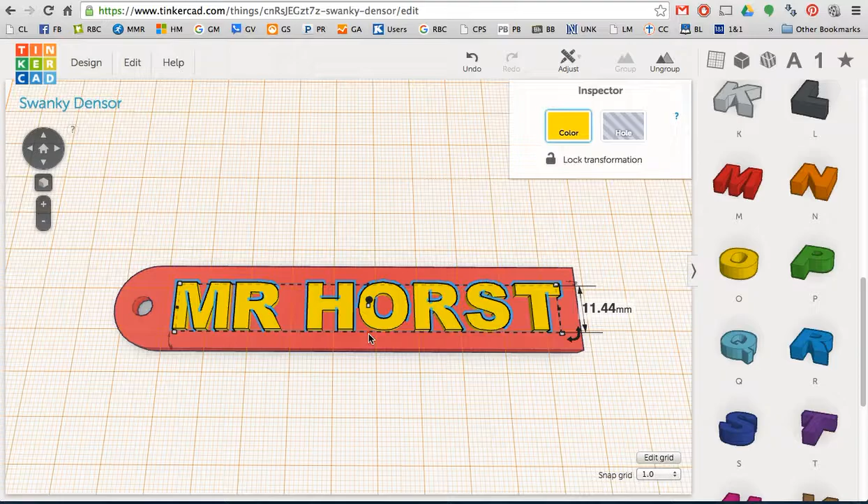The nice part about grouping my name together is if I want to shrink it, I can click my name, and because all the letters will change at the same time, I can grab any of these handles around my name. It's a little confusing because our work plane has moved, but I like to grab these white boxes in the corner, and then you can shrink the length and the width at the same time.

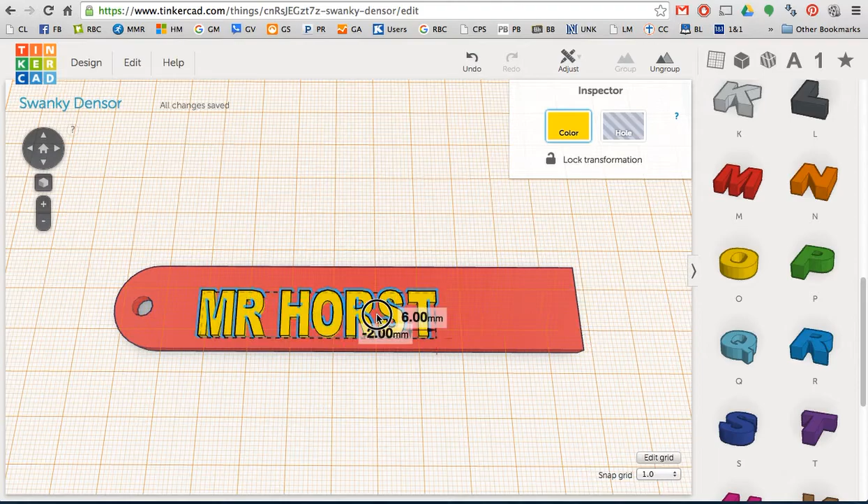So I'm going to shrink my name down, and I'm going to put it down here at the end. You can pick wherever you want it, if you want it in the middle, at the end. The only place you really don't want it is covering up your hole, otherwise when it prints it'll create a lot of problems and we won't get anything we're happy with.

So at this point I have my name in the middle, and I'm going to spend some time over here at the right in the library. I'm going to go ahead and close the letters. There's some numbers. You can add some numbers in there.

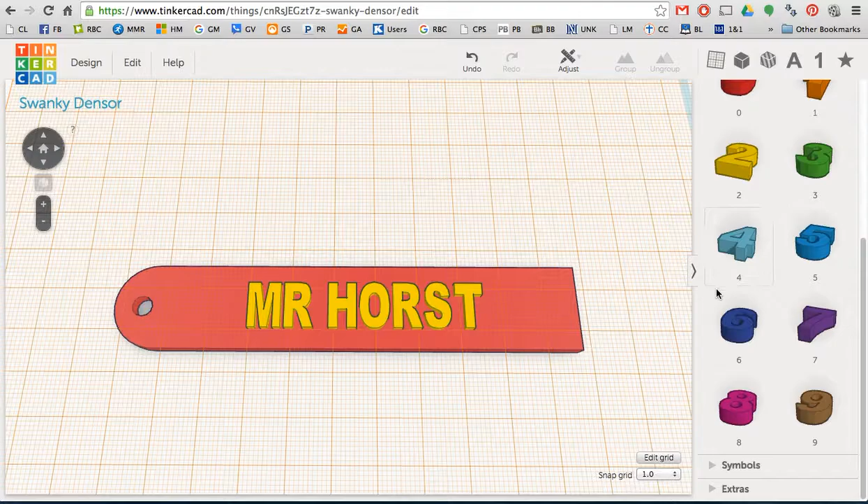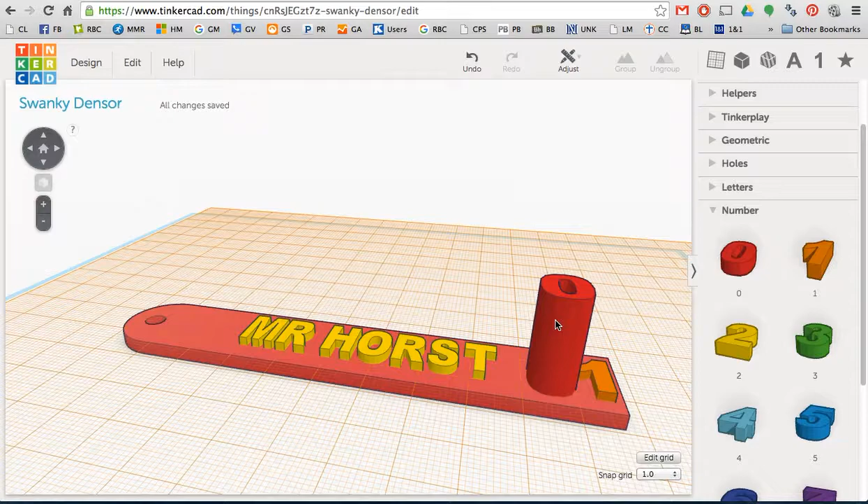If you have a favorite number, you can add it on to the end of it. If you wanted a 0, 1, you can drop both those in there, and customize them however you need to. You could change the height of them again, just so they go down to about 2. You could do crazy heights. If you wanted this thing to be 20 millimeters tall, you could do that, but I wouldn't recommend it because they'll break off fairly easily. So again, I don't want these, so I'm just going to click them and hit delete.

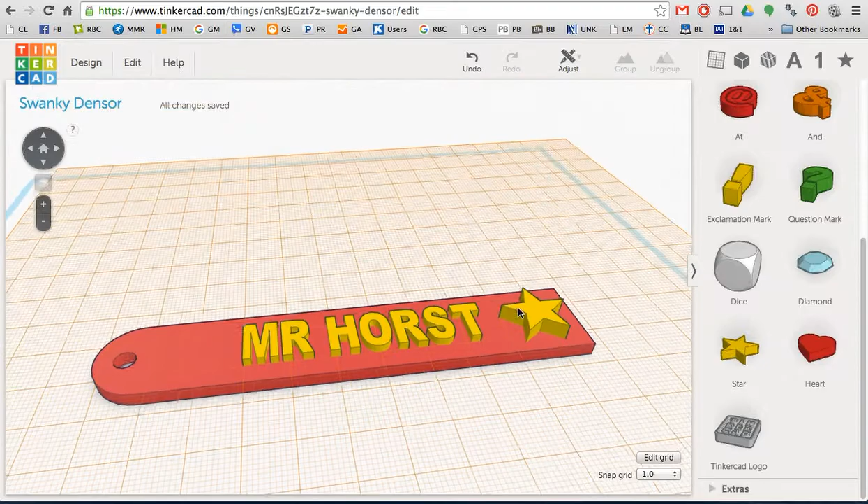So again, there's numbers there. There are some symbols, not a lot of them, but there's a star and a heart. If you really wanted one of those, like the star, I can bring it in here and stick it on the surface of my name tag, and see what that looks like as well. So you can merge shapes.

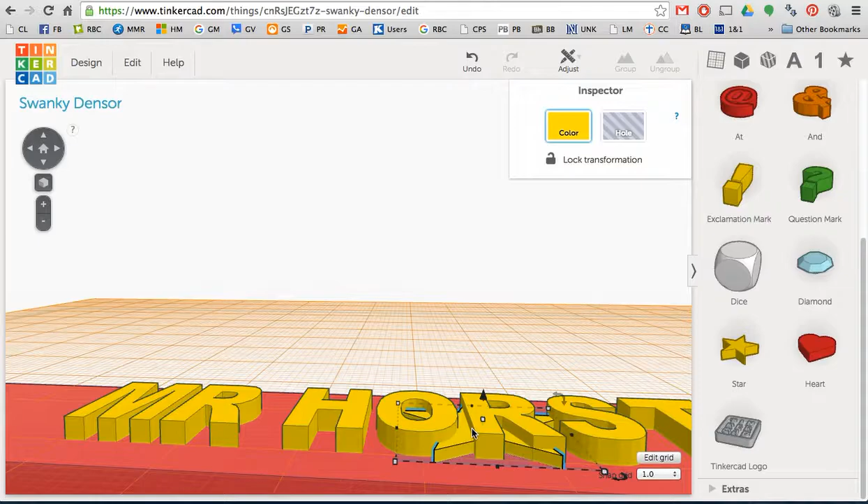My name is 2 millimeters tall, and if I wanted a star to be behind my name, I could smush this down to like 1, and drag it behind my name. When it printed, you can kind of see what would happen here. It would print a star behind my name at a different depth than my name. Might not look the best, might be a little harder to read, but it is totally possible, and it's something that you could do. But I'm going to go ahead and delete that.

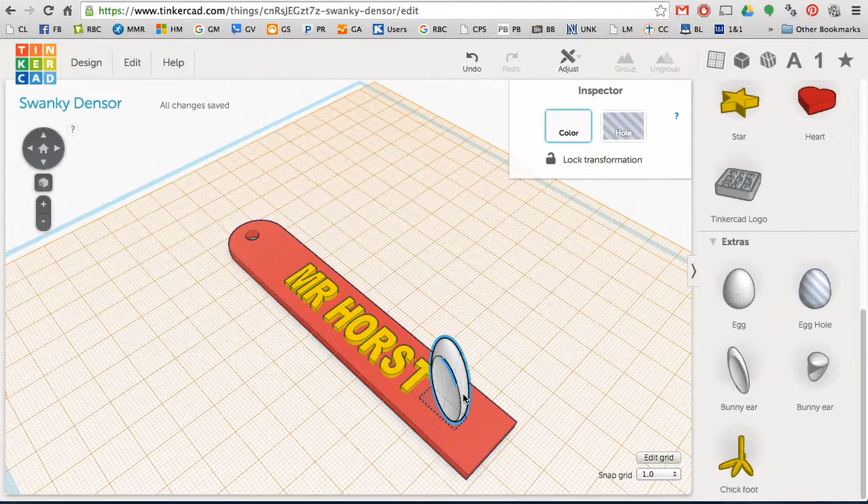So again, there's some things there. There's also some things in extras that you could try out. The one thing that is not a very good idea, if you grab something like the bunny ear here, is printing something like this on your name tag, just because they're very tall and very weak, they will break off pretty quickly.

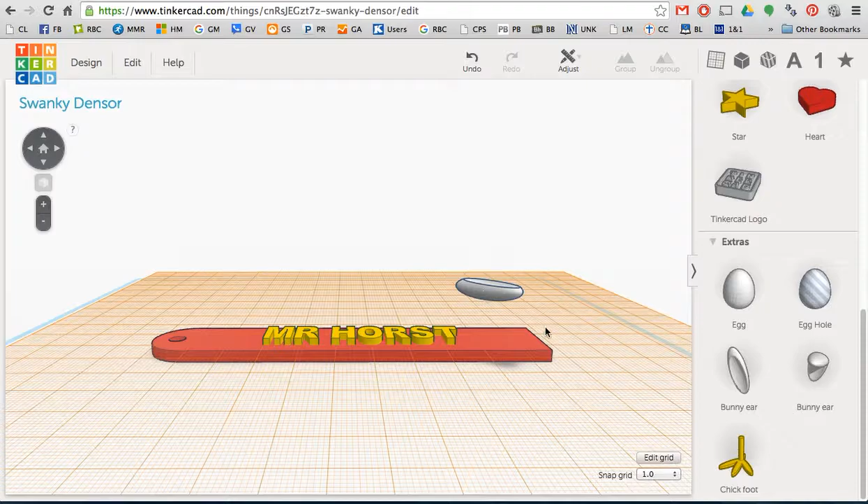And if by chance you rotated it so it was kind of floating in the air, it also makes things a little hard. 3D printers can't do something like this. They can't print the space underneath it. They can do what's called supporting to print this clear up here, but it would be pretty fragile and would break off very quickly. So for now we're just sticking with flat things.

I could click on this and drag it down, so it would be something like that. They actually can do this kind of printing, but here's the one thing that we don't want to do: we don't want something to be underneath our name tag so you can see the other side of it.

What that does is the 3D printer tries to print at the lowest point, and so if something sticks down here, it prints this first, and it has a very hard time making this look nice and smooth on the back. So we want to keep things so they're not stuck through the name tag.

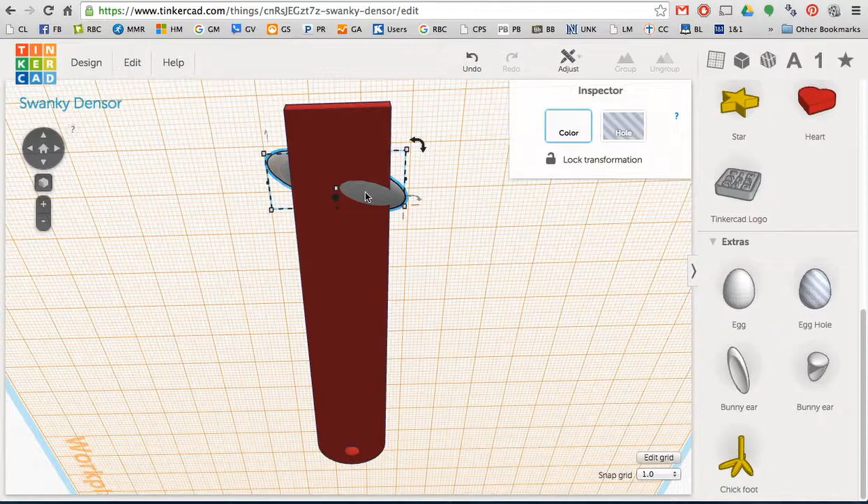I'm going to go ahead and reset my home view here too. So what I do want to show you though, we're going to go ahead and close the extras and the symbols. There's a couple things up here. You could import a shape if you had an STL file, such as our cardinal logo for our school. You could import this. There's also again the shape generators.

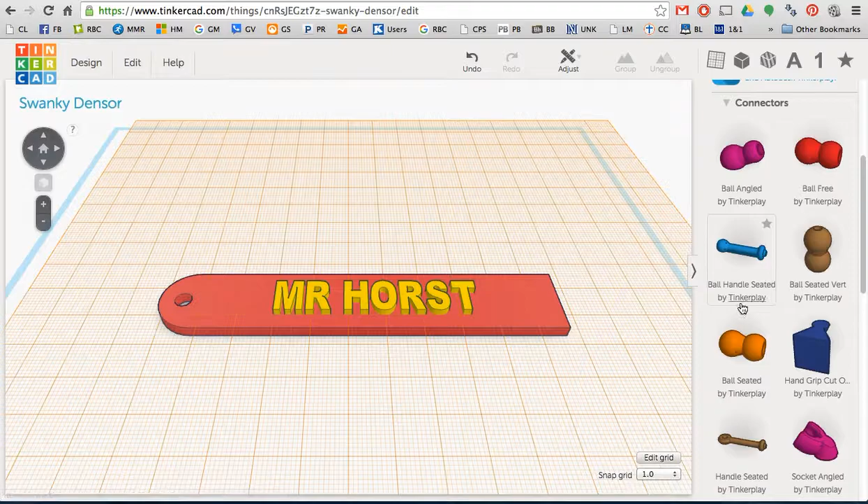There's the helpers. Tinkerplay has some interesting things. These don't seem to work very well for our name tag design, so I've had my students stay away from those. But the shape generators actually does have some pretty cool things in there. There's some TinkerCAD shapes if they ever load. You could do text this way. There's some rings.

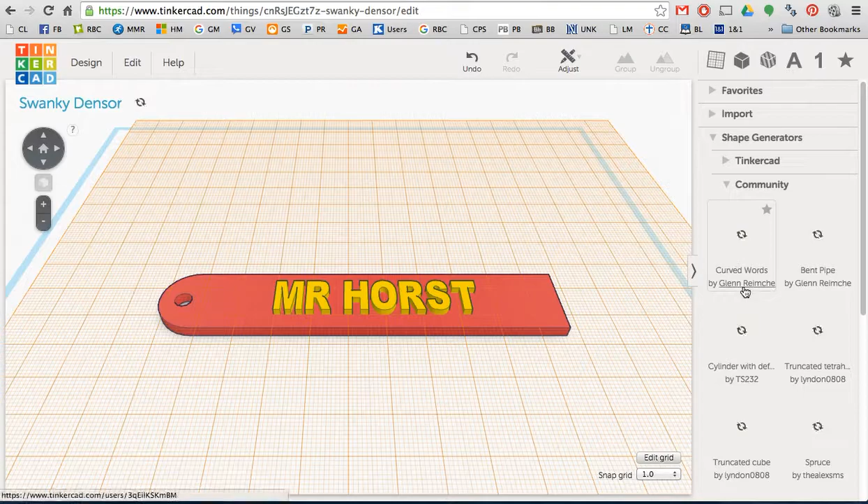There aren't very many of these, so we don't use them a whole lot, but the community is actually pretty cool. There are a lot of different choices in here, like a Christmas tree, and there are 23 different pages of things you could add.

So if you wanted a tree, you can just click and hold down and bring that tree in. Sometimes if it doesn't show up, you can zoom way back out, and usually it's stuck off to the side.

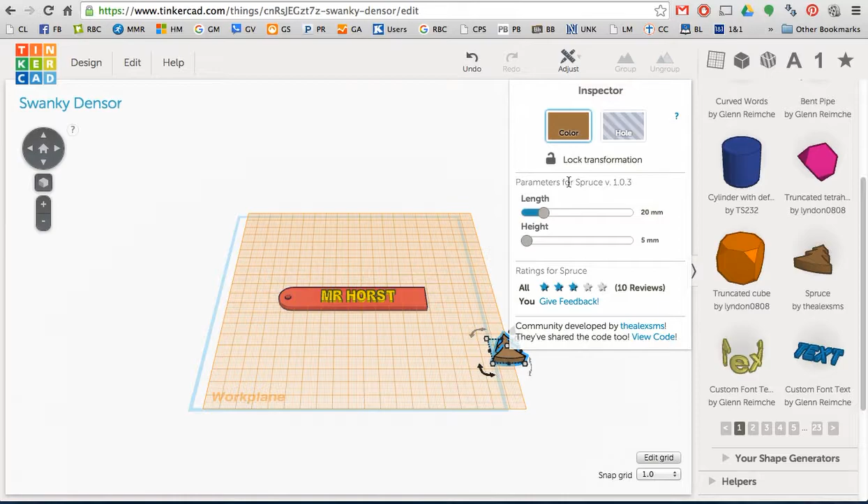The nice thing about these TinkerCAD shapes is you can actually change a lot of it just by clicking these sliders right here. So I'm going to bring my tree up to my workplane.

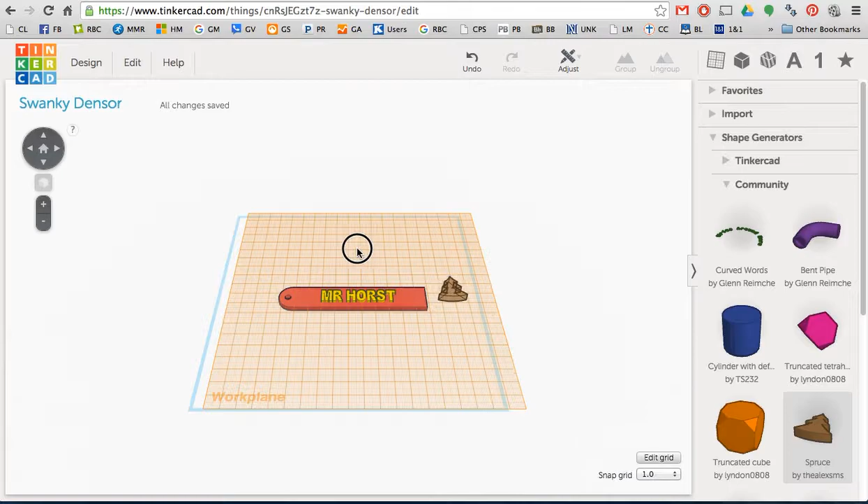For some reason mine's stuck, so we might just get rid of it and see what happens. We'll click on this tree and delete it, and try that one more time. There we go, and we'll zoom back in again.

That is the one problem I do have, is the inspector eats up a lot of screen space. So if I'm messing with something, I'll minimize my library over to the side. And there is my tree on my name tag, if I want one on there too.

The one thing I do like, if you keep going through the community, is on page 7, currently page 7 - it'll probably change later on - there's a lot of crazy different shapes.

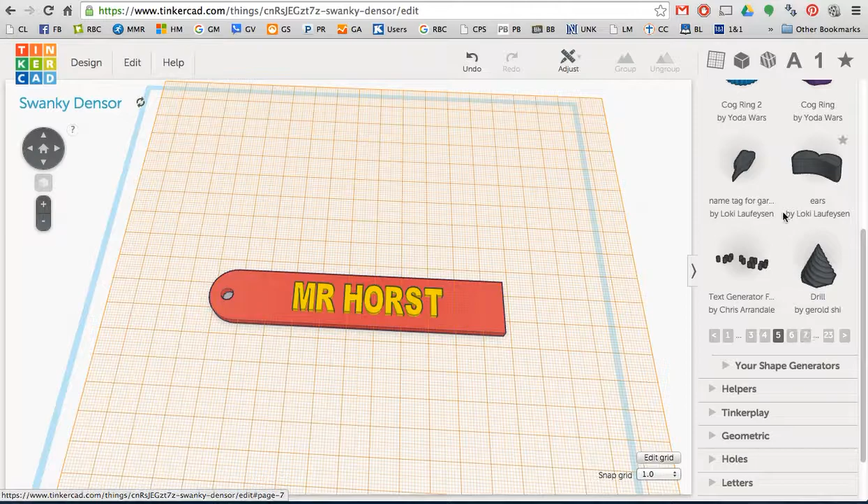There's a drill. You could totally add a drill on the end here and make sure it fits on your name tag, but now you'd have this huge spirally shape stuck on the end, which is pretty cool actually.

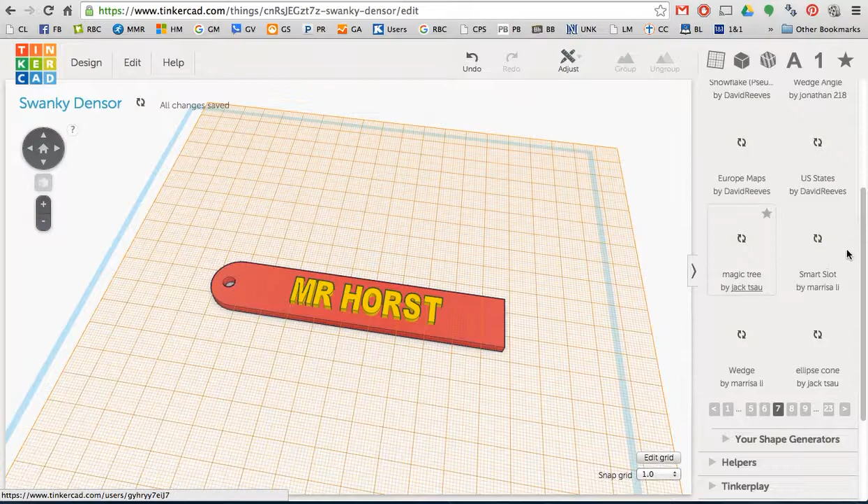And you can shrink those down too. But the one thing I think is pretty cool on page 7 is somebody actually went in and created US states. So if it'll load here, here are the US states.

Right now it doesn't matter what state it is, you can just bring it over to your work plane and it adds it. Once you drop it in, it actually shows you right here the name of the state, and you can click on that and choose different states by scrolling through the list.

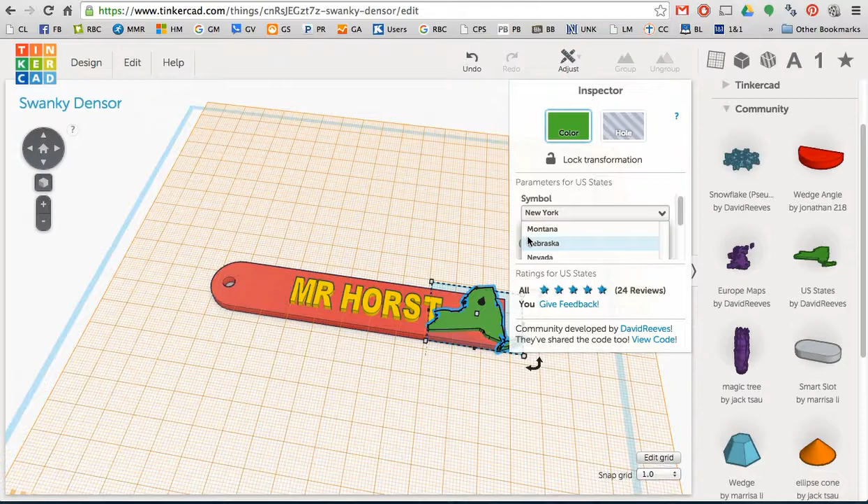So I can go find Nebraska over here at the end, and there's Nebraska. I'll click on that - it'll take a second or two, but now I have a Nebraska map on my keychain, which is pretty cool. I'm going to leave that there, I like that enough.

I'm going to go move my name over, and then move Nebraska back over. Same thing too, if you decide you need a different height, you can grab height right here and make it really, really tall.

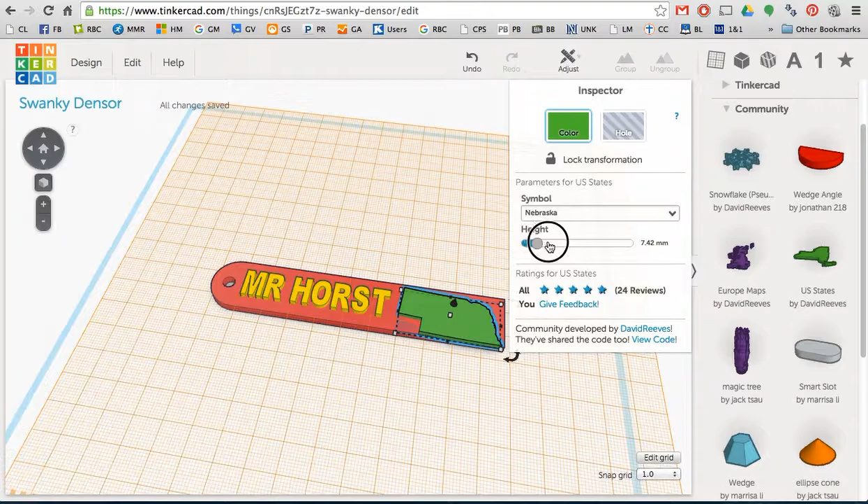Which does have a tendency to slow things down a little bit, so I'm going to go ahead and hit undo, shrink that back to 2 millimeters.

The one thing I do want to be careful of is making sure, before I'm all done, I can see right here if I zoom around, it looks like my state's sticking over my name tag just a little bit.

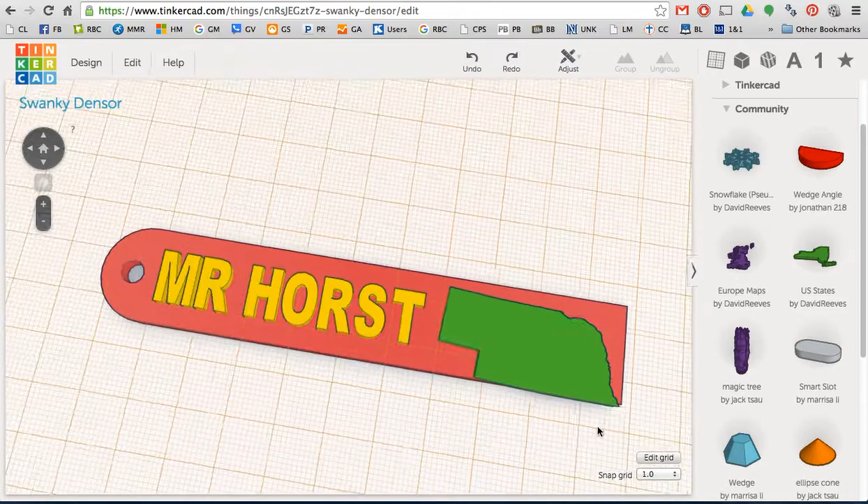So what I'll probably do is rotate back to the top, and I can use my arrow keys to kind of nudge it around to get it all back on here.

And if you're not happy with the way it angles, there are rotation tools, and you can spin that around to get it lined up however you want. So I'm actually pretty happy with that.

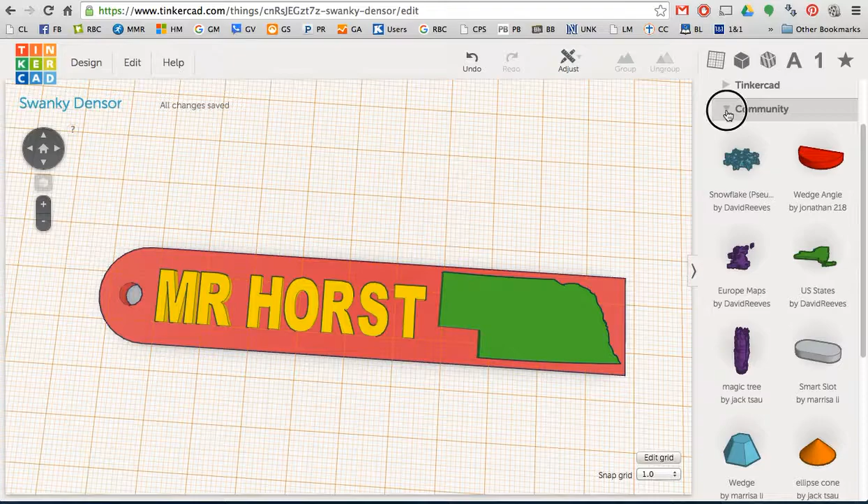I've got my name, I've got my state, and then I think the one thing I'll do is minimize that, go back to my symbols, and find a star.

I'm going to add my star to my state, but before I do that, to make sure it sticks above the surface, I can go back up to helpers, grab my work plane, and put it right on top of the state of Nebraska.

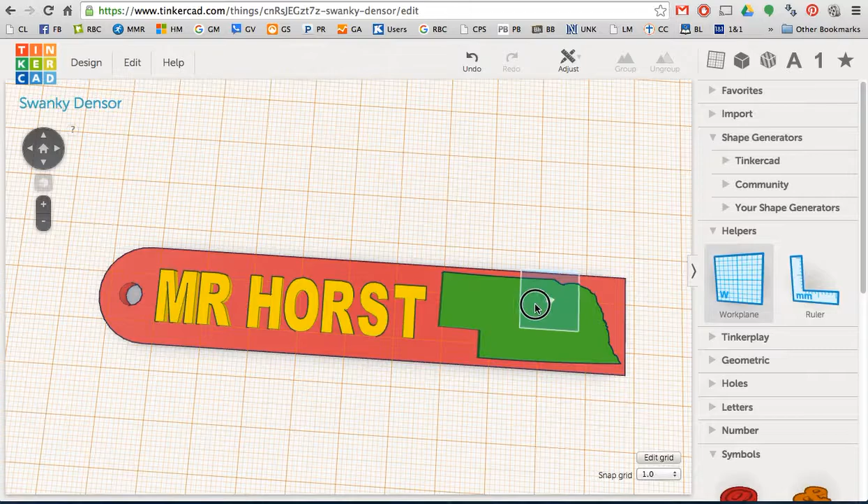That lifts my work plane a little bit higher again, and when I put this star in, I know it will be on top of Nebraska.

And there it is. So now if I look at it from my side view, you can see here's my name tag, here's Nebraska, and here's my star, which is really tall, and I don't really want that actually.

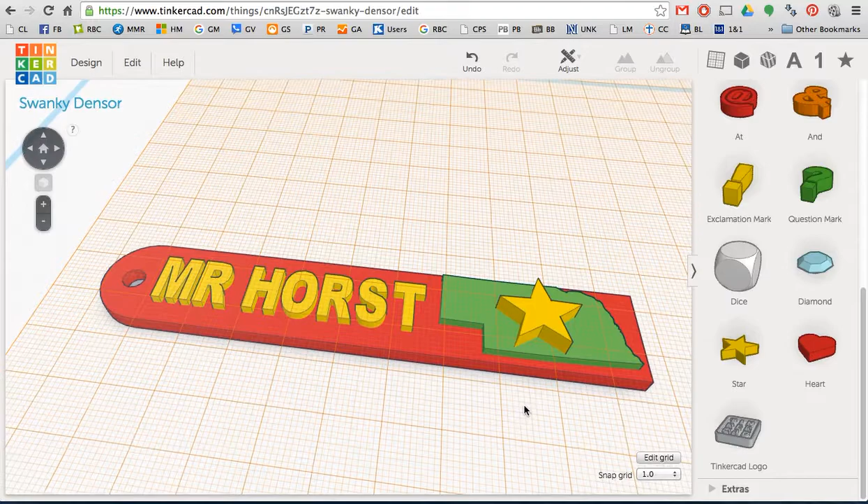So I think what I might try doing is click my star and smush it down a little bit - we'll make it 2 millimeters tall, just so it's not quite as tall.

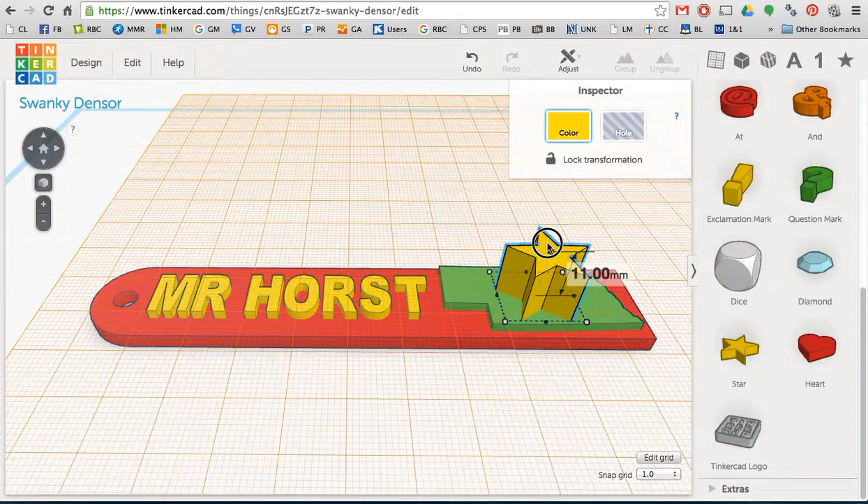If you want to go a bit further, you can click on your star and make it really tall, running it up to 15, and turn it into a hole. Then grab that black cone and push it all the way through your shape, so part of the star sticks below your name tag and above it.

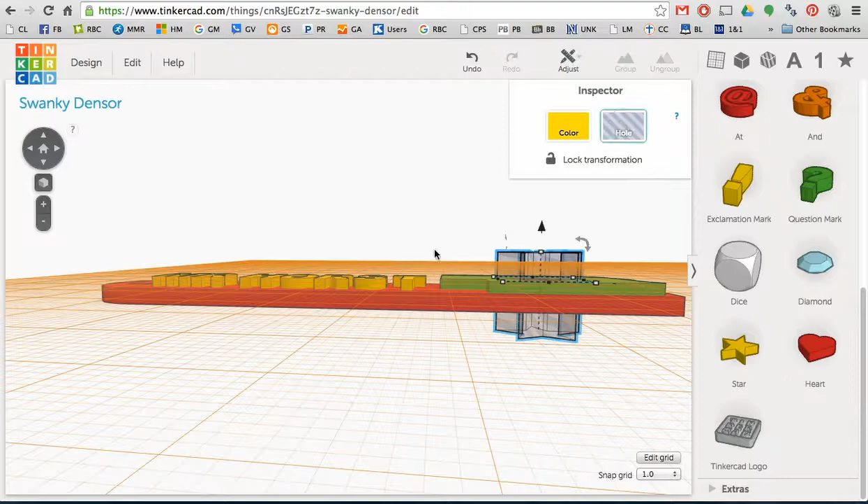When you click hole, it turns it into a space the 3D printer won't print. I'm going to group my name tag, state, and star together by drawing a box that covers all three, then grouping them into one solid shape. Now you can see my star goes all the way through.

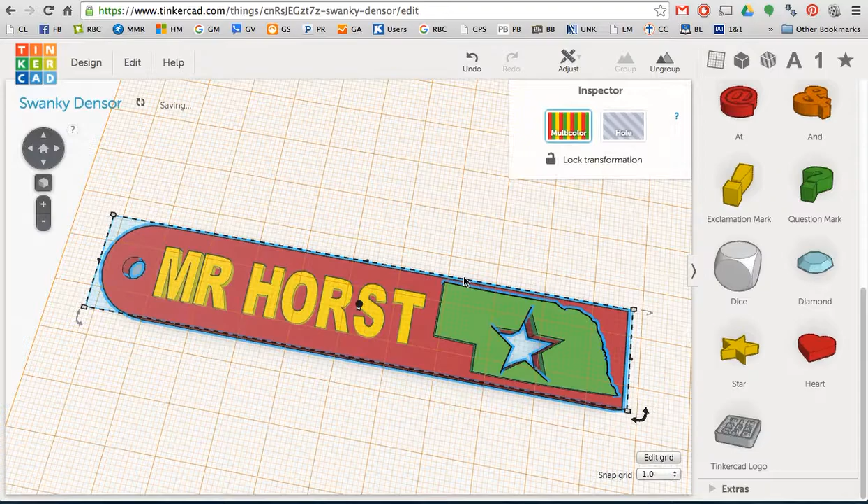If you're still having trouble with the solid color, there's a choice on colors. If you click that, it allows multicolor. As soon as I click multicolor, my state of Nebraska turns green again, and I can see I have a state, my name, and a star that goes all the way through it.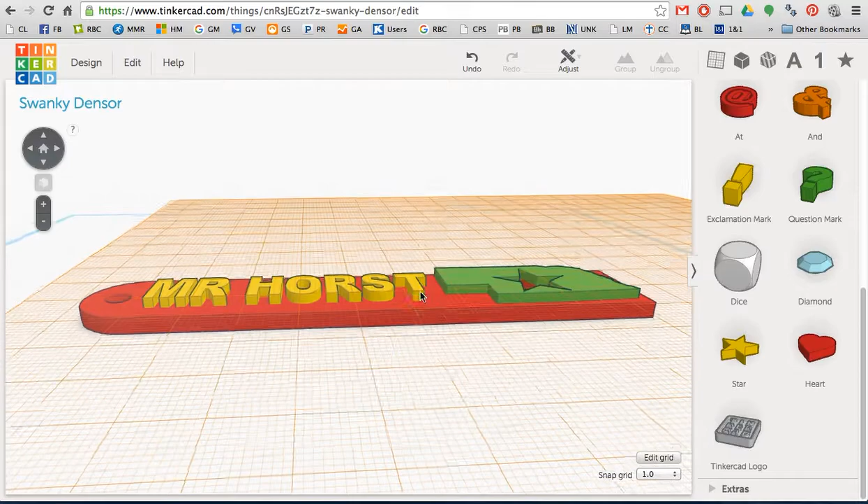Before I finish, I want to make sure nothing is sticking on the bottom of my name tag, because if it is, the 3D printer won't be able to print it well, and it won't be nice and smooth like it should be. So I'll click on home to reset my view.

You could add as many things as you want. I've had students add several items to the top, but I think I'm pretty happy with this for now. You could add rows of stars across the bottom and do a lot of different things. While we're here, I'll show you that real quick too.

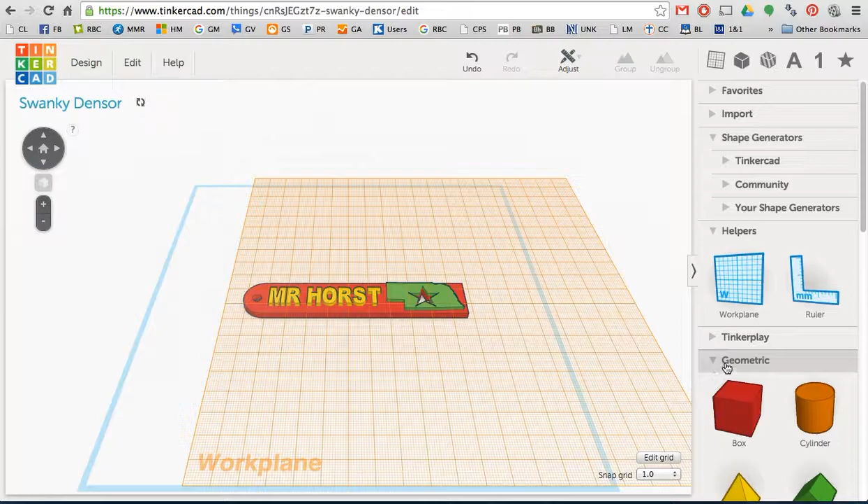If we go back to geometric, you could grab something like a pyramid and bring it over here. We'll zoom in because that pyramid is pretty big. I'll click the corner, shift and click to hold it down. At any point you could have stopped once your name was on here, but just to illustrate a few other things, we'll keep going.

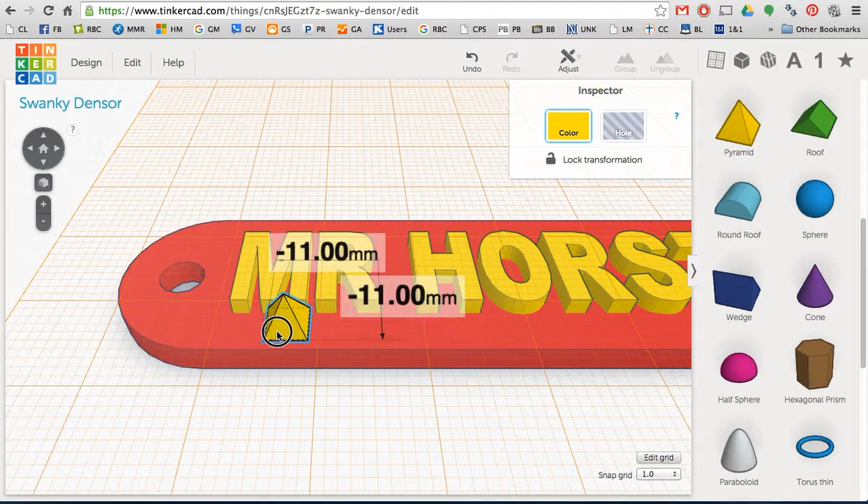I can move the pyramid down to the corner, and if I'm not sure it's lined up right, I can change my view, and it definitely is not on there. I'll move my name up a little bit, and move the pyramid up with it.

Now I've got one on here I'm pretty happy with, so I can copy and paste, or use edit, duplicate, which makes an exact copy right on top, and then nudge it over with the arrow keys. I can keep doing edit and duplicate to make a whole row of these going all the way across my name tag.

Again, edit, duplicate, and slide it over. To get faster at it, I can shift-click: click my first shape, hold shift, click the next shape, then the last one while still holding shift, and that selects all 3 pyramids here.

If I do edit and duplicate again, it makes a copy of all 3. I can line them up just like this, and do edit and duplicate again—though with my luck, that didn't work, so we'll do this again.

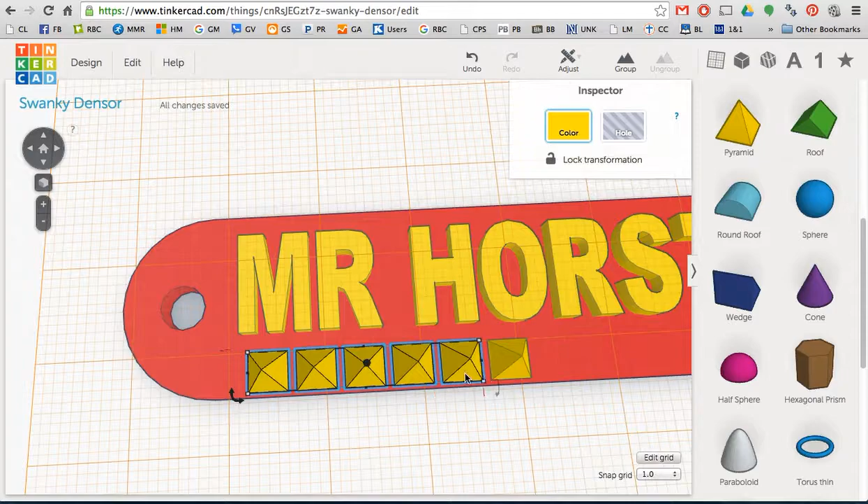Now that I've got 6 of them, I can click my first shape, hold down shift, click the second, third, fourth, fifth, and sixth shapes, then do edit and duplicate and slide them over again. Then shift and right-click, or shift and two-finger click, to move down, and I think that looks alright.

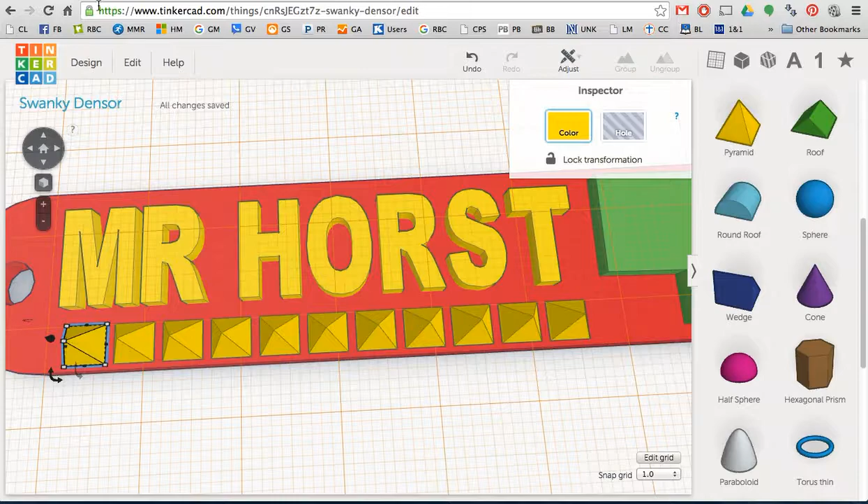I'll delete this last one since I don't really need it there, so I'll click it and hit delete. I think I should probably add one more over here to this side, so we'll see what this looks like. We'll edit and duplicate one more time, then move that to the left and see how that looks.

So I'm pretty happy with that one. It's got a lot of stuff on it, but that's alright too. I'm going to click home, and it will reset my view.

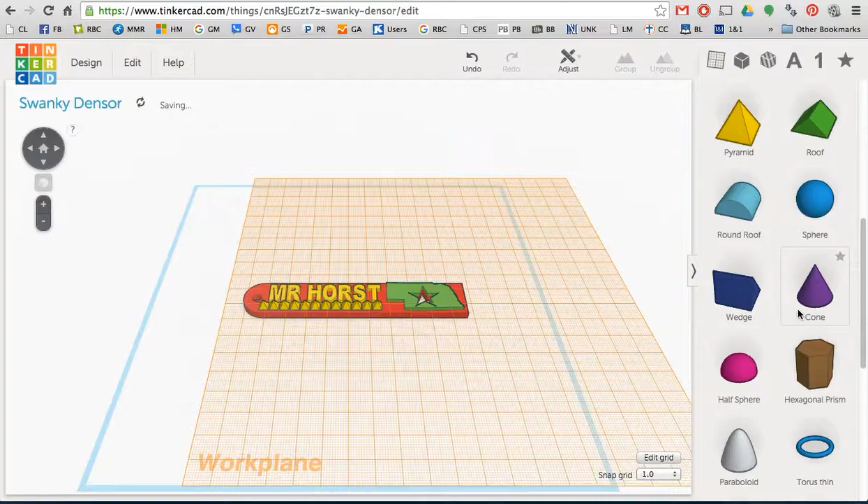Go back up to the top, and I'm going to click on helpers where it has work plane, and I'm just going to drag my work plane out here to the work plane itself. If you want, you can drag it right on the word, but that resets my work plane so I can see everything now. So I'm going to go ahead and close these.

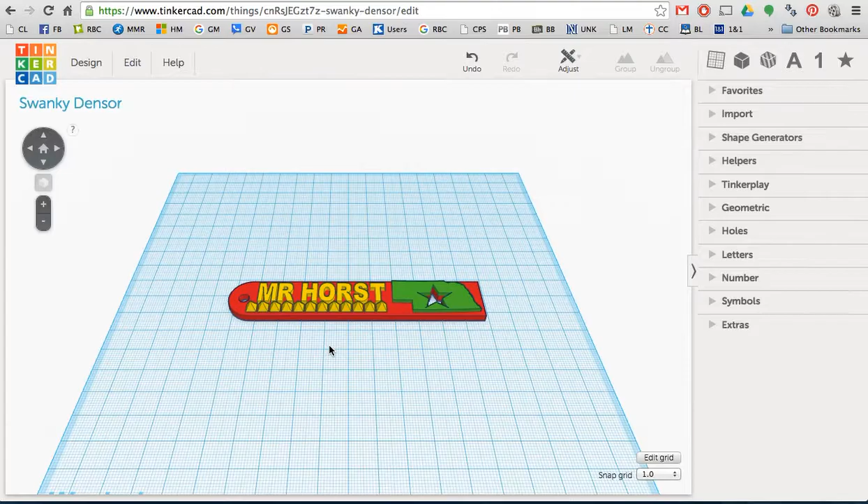So my library is all closed up again, and then I'm just going to zoom around and make sure my name tag looks okay. So I can see this here. Oh, that's a good thing I stopped and looked, because my pyramids right now are actually floating above my name tag.

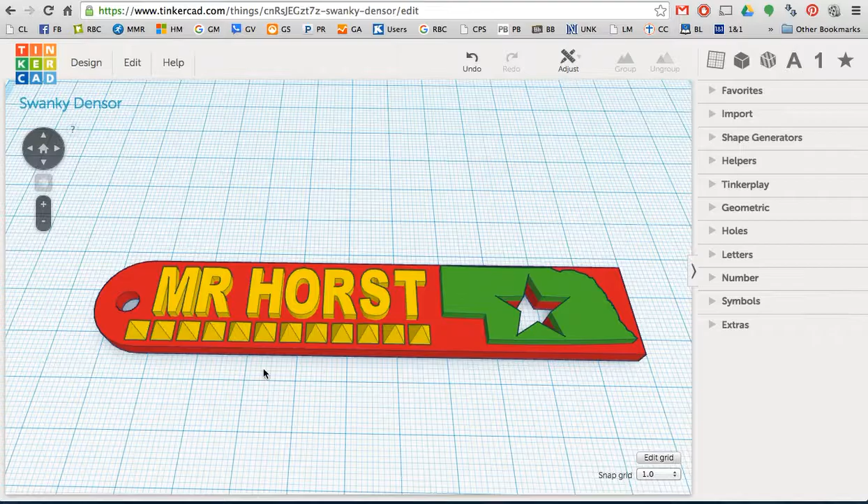So these actually wouldn't be able to print on my name tag at all. And that's because I still had my work plane on the state of Nebraska instead of on my name tag. So this is actually a good mistake to make. But the nice part is I can click the first one, hold down shift, and click the rest of these.

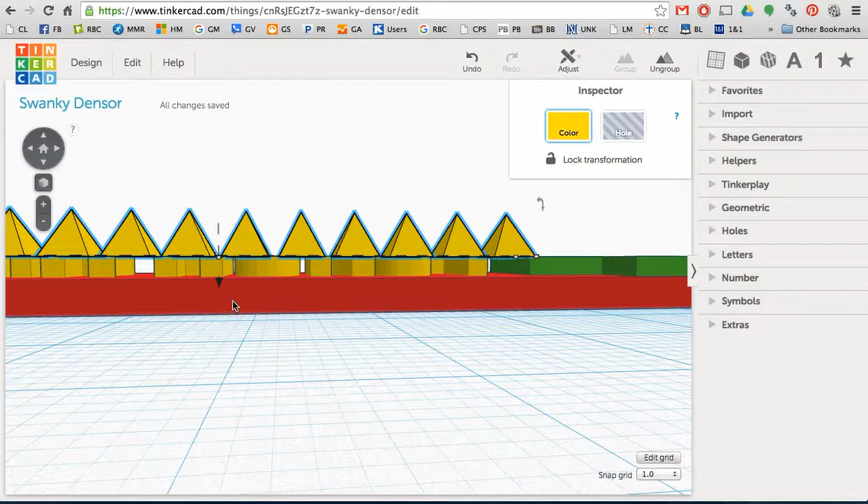Okay, so I clicked each one individually, and then I'm going to go ahead and group these just to make things easy on myself. And so what I can do is I can zoom in now, and the black cone is moved, but it's going to show me if I click and hold down, I can pull these down and put them right on the surface of my name tag.

I can even go underneath one, and so the points kind of disappear. If I go down too far though, this is what I would get on the bottom, and this would be a bad thing for me to print. My print would not work this way.

And so I'm going to click this black cone to bring them back up off the surface, and you can see over here at the right side it has a -1. That means it's below my name tag right now.

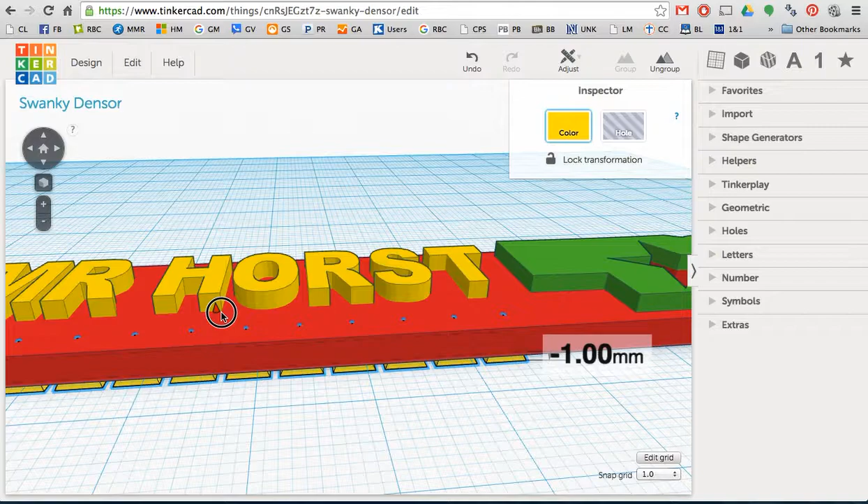So if I go up to 0, they are flat with my name tag, and you could actually see the yellow or the square shape sticking through the bottom, and I don't want that either.

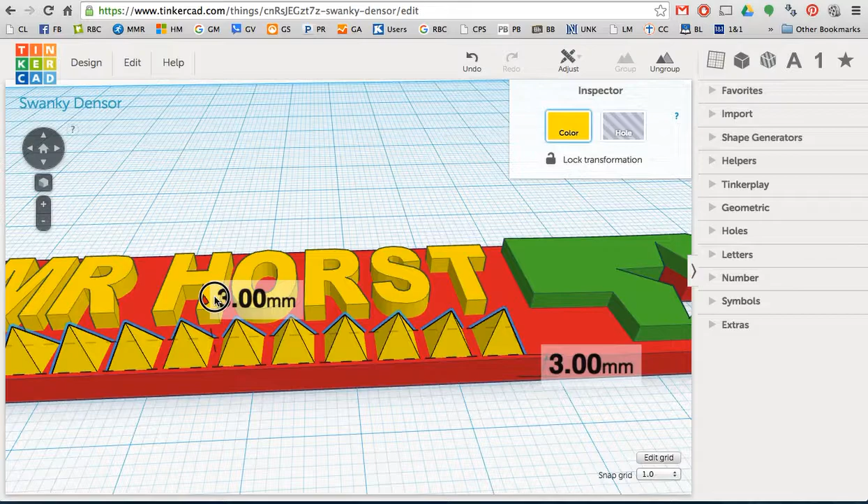So I'll go up at least one more, and every time I bring them up, you can see that it goes up there. And my name tag was 3 millimeters tall, so I know that by seeing the number 3 over there, that I am resting right on the surface of it.

If you want to go down to 2, it just puts less of the pyramid through, and I kind of like that look too. So, but that is my name tag right there. I have my hole for my keychain, I have some shapes, my name, things I've added on there.

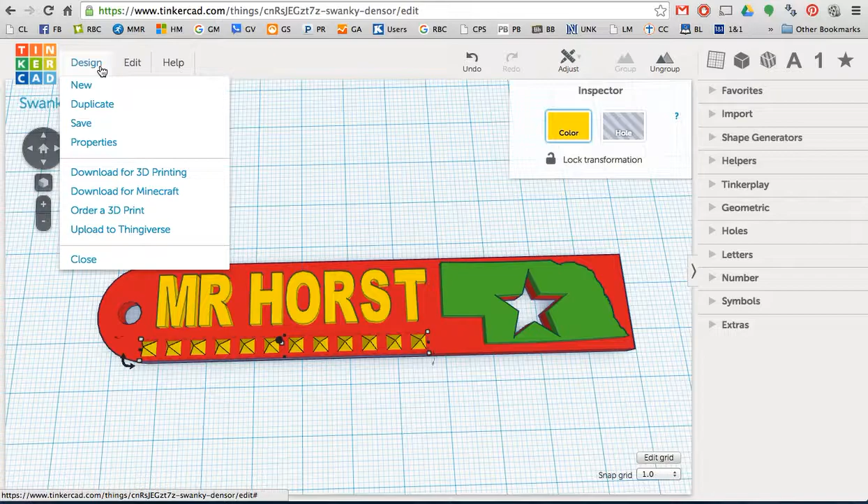The final thing to do, just to make it easy on myself, is on the design menu, you have an option for properties. So we're going to go ahead and click on properties. And they give some goofy names by TinkerCAD, but I'm actually just going to title this so I know what it is. So this is my name tag.

And then I'm going to leave it private, and that way nobody else can get it. I don't really need anybody else. It's nothing that creative, but it is something that I just don't really need people to share.

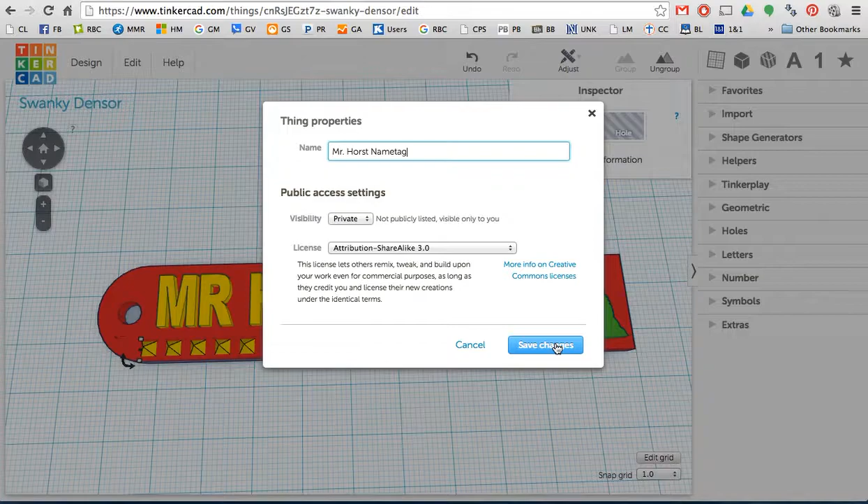So I can hit Save Changes, and my name up here should appear when it is completely saved. It'll take a few seconds depending on how complex your shape is. Just some other things could happen in the middle too, so don't be surprised if everything kind of disappears for a little while. It'll eventually come back and then rebuild your shape.

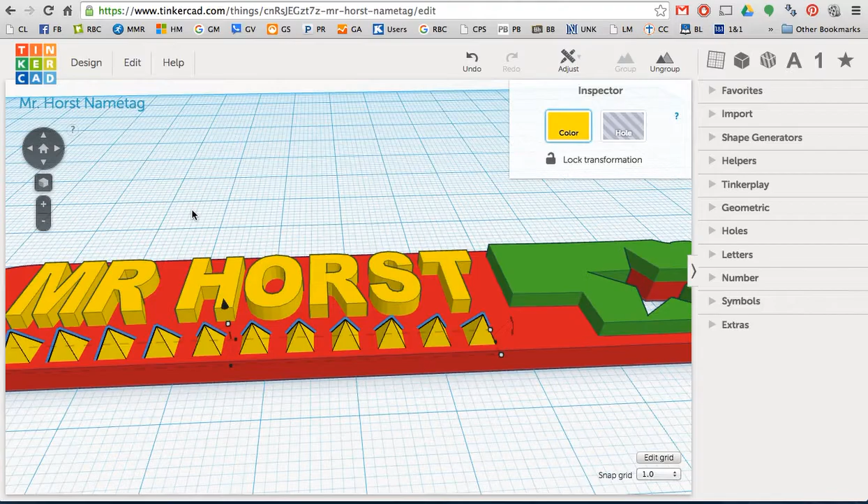So that is our completed name tag. From here, again on the design menu, we could actually order a 3D print from here. They are a little more expensive.

For what my students do, they actually just click on download for 3D printing, and so we're going to go ahead and click on download for 3D printing. If you were all done for the day, like my students didn't get a chance to finish and they need to save it, if they actually hit close, it will save it before it closes.

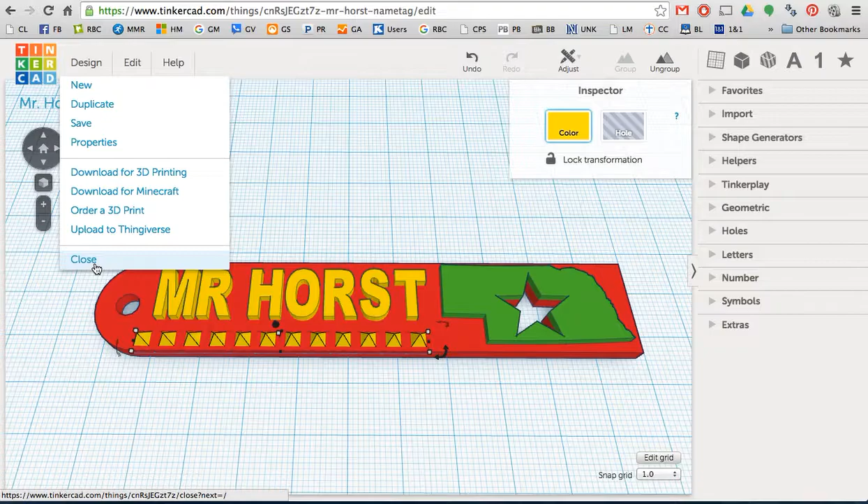But for what we're doing, we're going to go ahead and click download for 3D printing, and then we have different choices. Our MakerBot, because it's printing in just one color, works the best with the STL files.

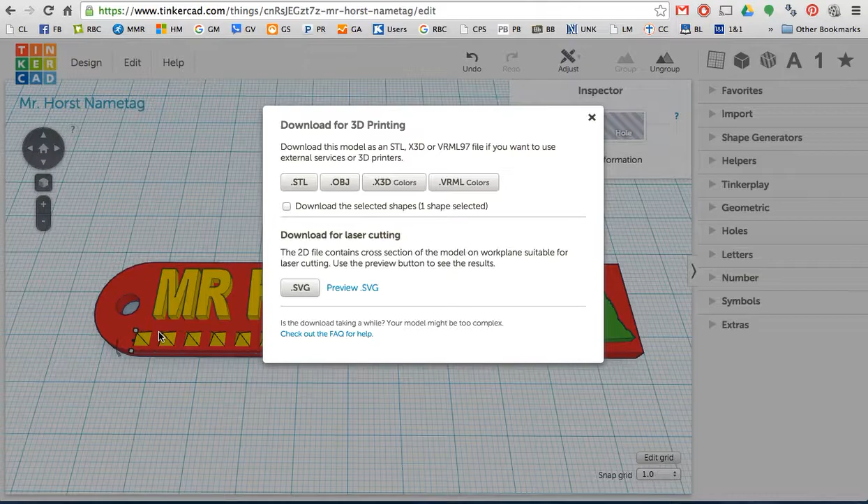So if you click the .stl file, which you should get at the bottom of your browser, depending on your browser, is right here. It just downloaded my name tag, and this is an STL file which I can drop into MakerBot software. So I'm pretty much done with this one, and we'll go ahead and stop here, and then we'll see what it looks like in the MakerBot here in just 1 second.